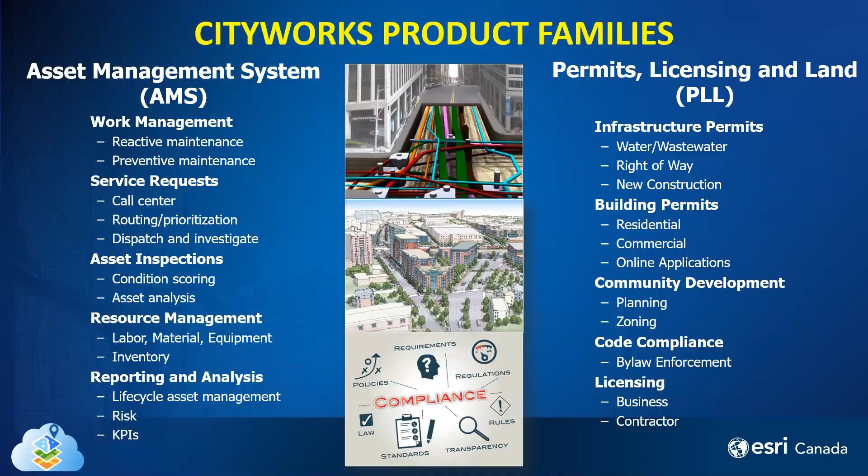CityWorks is a proven solution for asset and maintenance management, with over 70 users in Canada and over 750 users in North America, and starting to grow worldwide. This is a great family of users who support each other.

When you become a CityWorks user, there is a website called My CityWorks that you will have access to. And there's a forum where you can ask questions, and the answers will come back from someone in BC or Alberta or Florida or Michigan, explaining how they solved a need with CityWorks. This is a great way to talk to your counterparts, people who do what you do, and how CityWorks supports their business needs.

ESRI Canada supports user conferences where customers come together to share their experiences on how they use CityWorks to solve business needs. New Tecumseth and ESRI Canada have been working together to modernize their asset and maintenance management processes with CityWorks and Assetic Asset Optimizer, along with building permits and bylaw case management. A real team collaboration approach has led to project success. The town now has the knowledge to grow and build out the use of CityWorks to all other departments.

Municipalities have a need for managing the maintenance of their assets, tracking the work history against assets, ensuring inspections are being done to mitigate risk and follow government regulations, collecting asset condition on a regular basis, and tracking repair history that feeds into the organization's asset management system.

The Assetic Asset Optimizer asset management system takes the information from CityWorks and develops long-term budgets for rehabilitating or replacing assets in a timely and effective manner. Being able to visualize these plans on a map allows an organization to see where projects overlap and plan to combine projects to save money and reduce inconvenience to the customer. This eliminates replacing a water line and patching a road one year, then resurfacing the road a year or two later, when both projects could have been done at the same time.

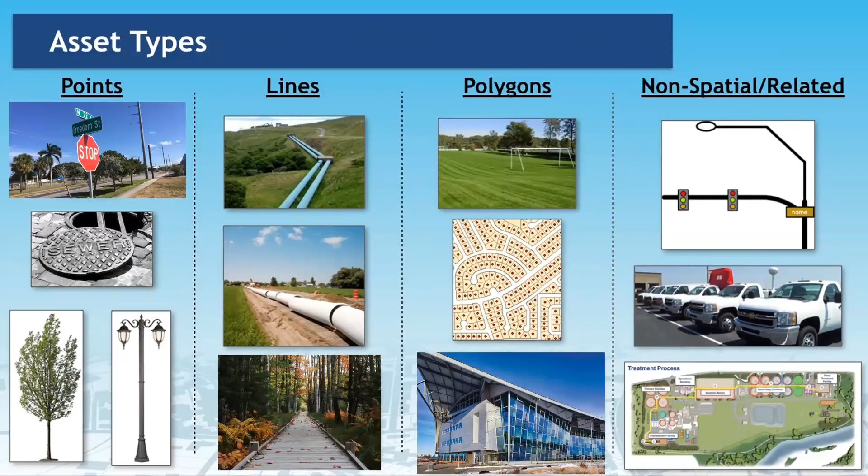So with that, I'm going to turn this over to Lisa and Arun so they can share their experiences.

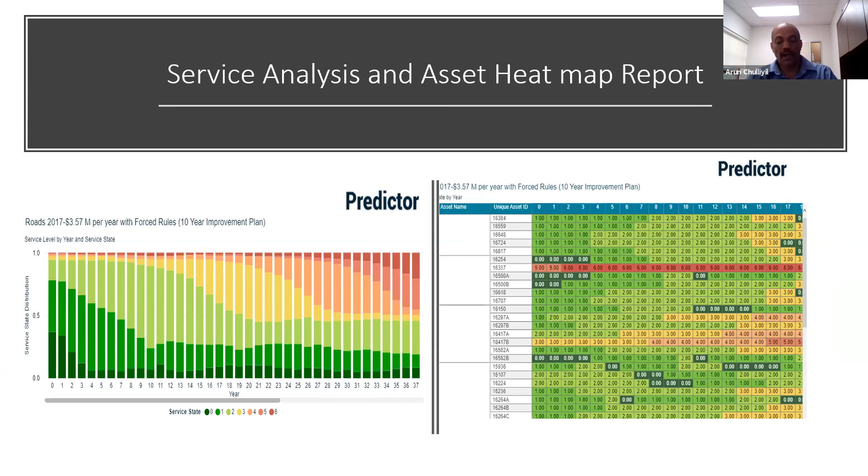The asset heat map is a granular report that helps us to understand which of the road segments are in good condition, which is shown in green, and those that are poor to very poor in orange and red. Next.

Now I'm going to pass on to Lisa to talk about CityWorks. Thank you. So yes, Arun did a great job in talking about the asset management business need, but we also have business needs for each of our departments within our town of New Tecumseth.

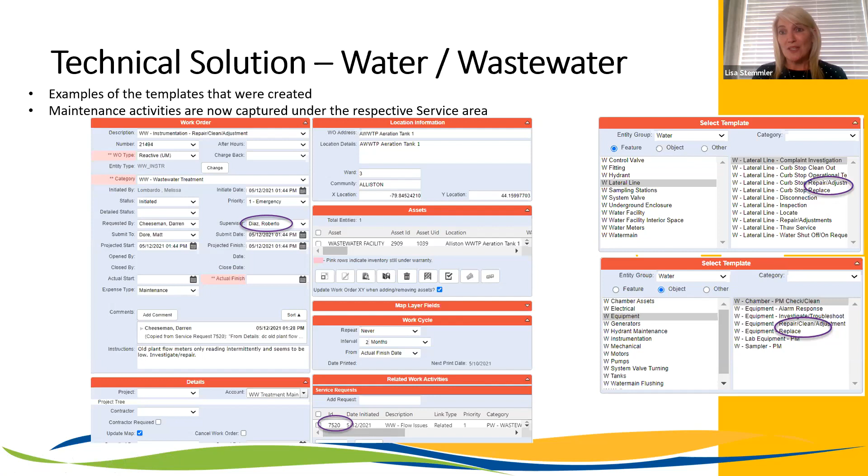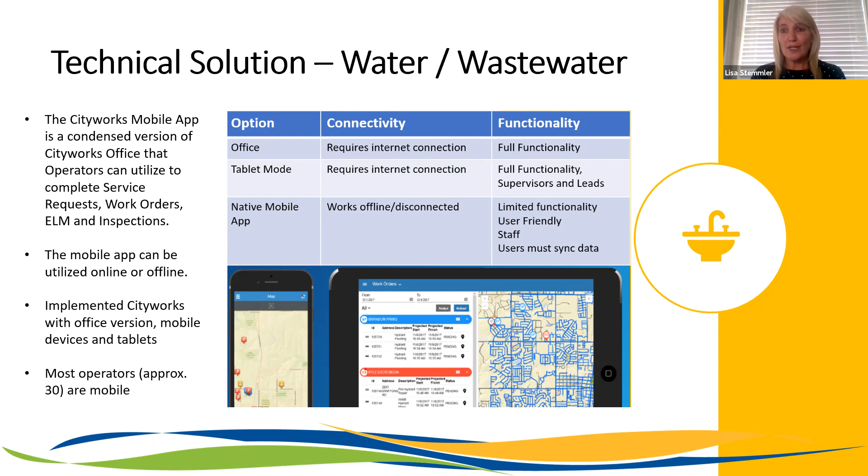In the water and wastewater area, we also implemented our mobile solutions. CityWorks offers a number of different mobile solutions, and we have been working with three. We have our regular office version, but we also have a tablet version which has the full functionality, but must be in connected mode. We also use the native mobile app, which works offline and is user-friendly, but has limited functionality. These mobile solutions are utilized in water and wastewater for our operators, but they are used in other areas of the organization as well.

In terms of the business need for roads, we needed the ability to log and maintain customer service requests and report back to council by ward. In the past, that had been a very manual reporting process, and we really wanted to automate that process. We wanted to create and track work orders via multi-purpose devices.

The CityWorks implementation mirrored our AVL solution implementation, and the two projects required mobile solutions, so we split the cost and utilized the same tablets for both AVL and CityWorks. We also required accurate and detailed reporting for major events, such as inclement weather. If there is some kind of legal litigation that we need to follow up on, we have the detailed information in our CityWorks applications to report on that at the detailed level.

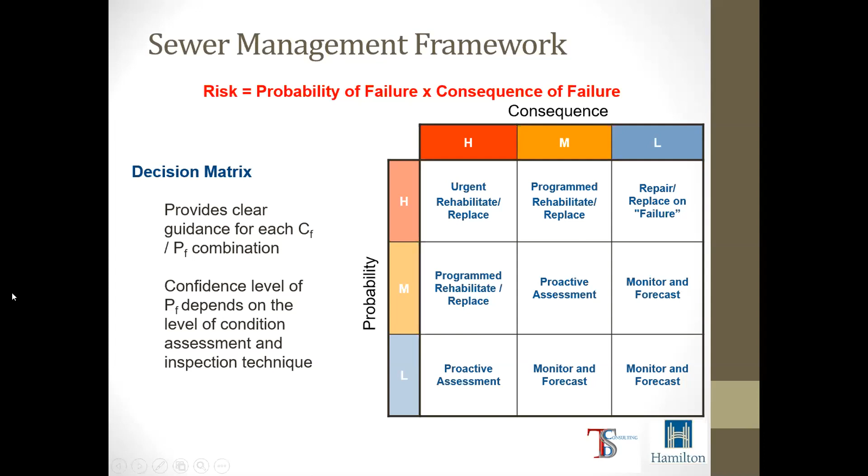The city's wastewater assets are categorized into types of inspection programs. The criticality and the consequence of failure is calculated by four indices based on the influence of the asset's failure on monetary resources, operation ability, and society and the environment.

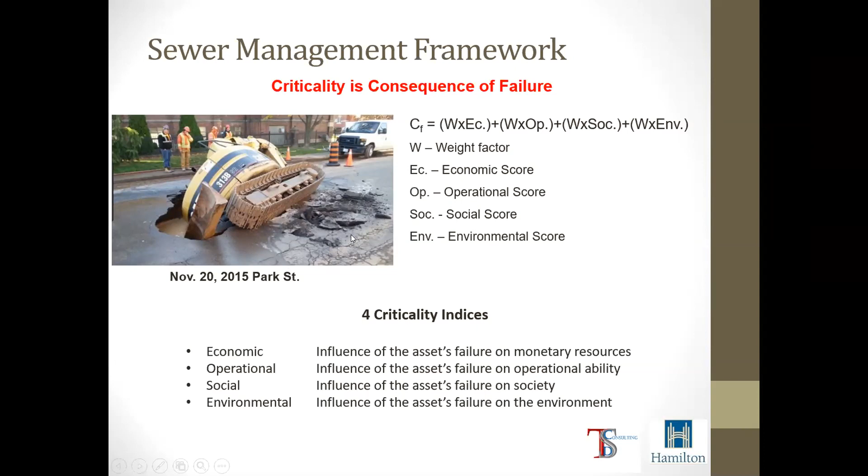You can see here this massive sinkhole that this excavator fell into on Park Street. Park Street is a fairly busy street downtown with a high consequence of failure rating.

The city's wastewater assets are categorized into types of inspection programs: large diameter pipes requiring specialized inspection programs, small diameter mainline and lateral CCTV inspection programs, and zoom camera inspection programs.

Specialized and CCTV inspection programs drive capital delivery. They require quality assurance and are considered critical assets. Routine inspections are performed using traditional pan and tilt CCTV and zoom camera.

The city looked closely at their end game decisions. At the end of the day, they built their intervention toolbox that consists of CIPP mainline and lateral lining, panel lining, grouting, spot repairs (essentially any repairs not done from manhole to manhole), manhole lining, in situ pipe repairs or renewal, and replacement.

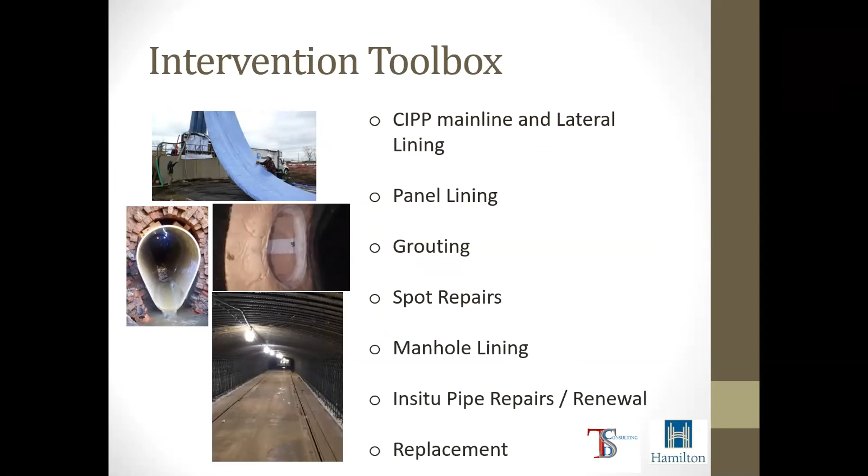We developed a logic to mimic the human decision on the action required on a pipe from the condition set assessments resulting from CCTV surveys. We decided an appropriate intervention method based on the individual defect codes and observations recorded within a CCTV survey. It does not, nor should it, assign an action based on the overall condition of the pipe.

This allows the city to make a decision based on the worst case scenario: considering the severity of defects, whether there are structural issues or operational and maintenance issues, the number of occurrences of each type of defect, and whether defects are occurring in long or short pipe sections.

For example, one might not necessarily want to perform a short spot repair on a 20-meter section of pipe. Rather, the best asset management decision might be to just line that short pipe section manhole to manhole.

The application also determined the length of each inspection, including reversals performed on the same pipe inspection. This allows us to quickly QC whether an inspection is complete, too short, or too long.

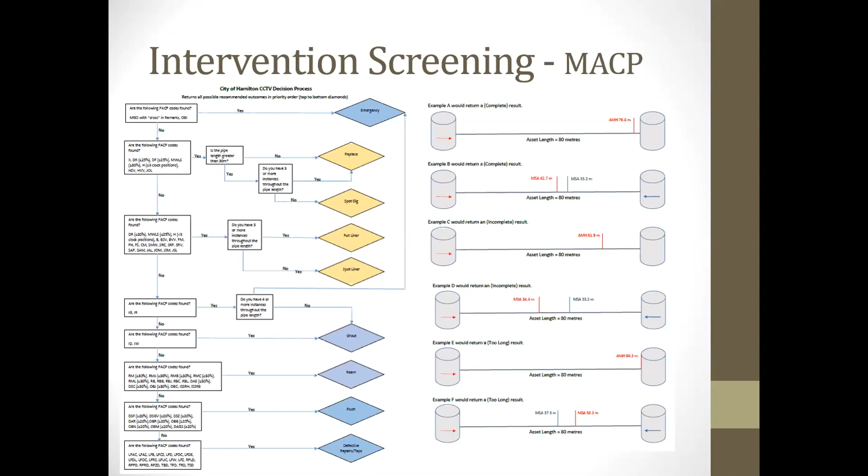The logic allows the city to focus on emergency response, which can include situations such as missing manhole lids, crossbores, cross-contamination, and surcharging. It allows us to focus on assets requiring immediate attention for capital improvement, and the ability to group capital improvement projects into actual full programs.

These actions include full length or open cut replacement, full length or open cut lining. Finally, if there are little to no structural issues, which typically drive capital works, the logic allows the city to focus on maintenance programs and maintenance cycles. It also determines when no action is required and the asset is slated for re-inspection.

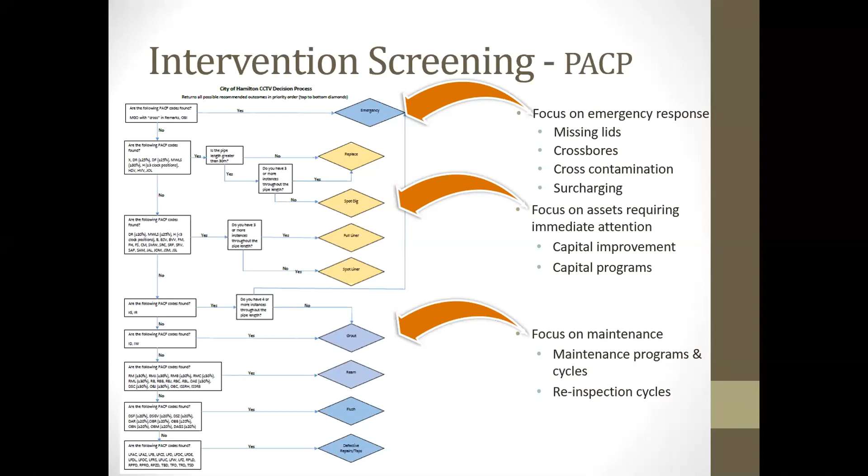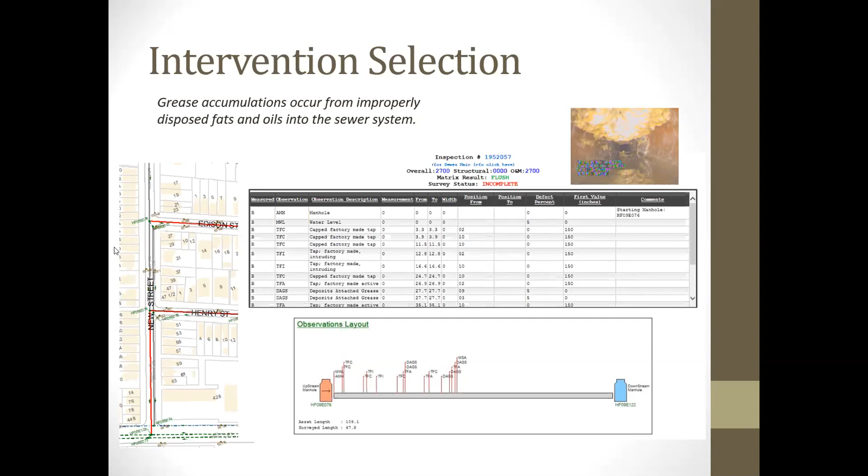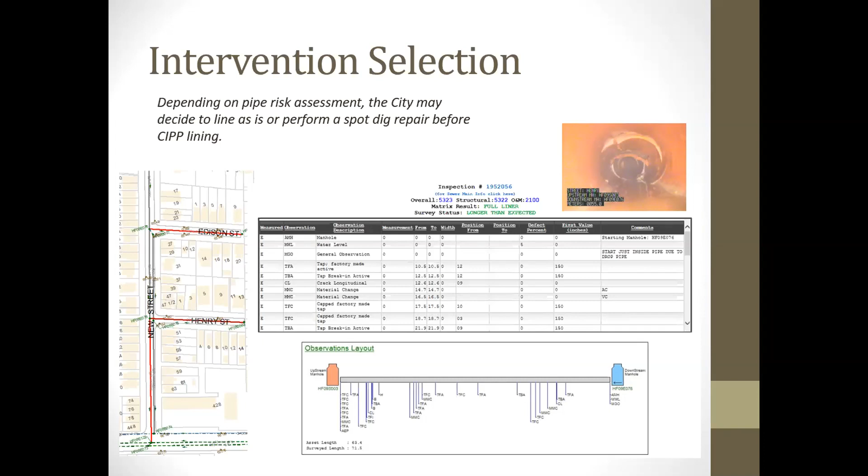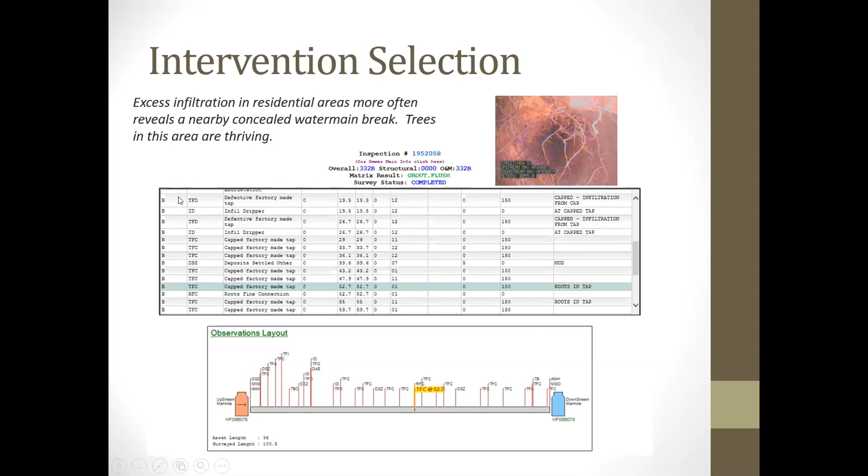So in conclusion, what this simple matrix has done for the city is considerably reduce staff time spent on CCTV data review, data management, analysis, criticality, and determining the required action.

The logic screening serves as almost an artificial intelligence. It follows a human decision. Originally, when it was first put together, it produced an over 80% accuracy rate on following that human decision. It is fully customized and editable. Through tweaking and moving little bits and pieces back and forth, it is now actually giving an over 90% accuracy rate for the city.

There are a few inconsistencies where, for example, the program might be telling the city, hey, you need to replace it, you need to open cut and replace it. But that sewer section runs underneath the building, and open cut is just not a solution at this point. So there are a few situations like that where it might be flagging an improper result, but it's just not feasible due to above ground site restrictions.

The really nice thing about this logic is it does not rely on human interpretation. So it is absolutely 100% defendable, and there is no intervention or questioning in terms of why you would pick that result for one sewer section versus a different result for another when they're displaying the same defects.